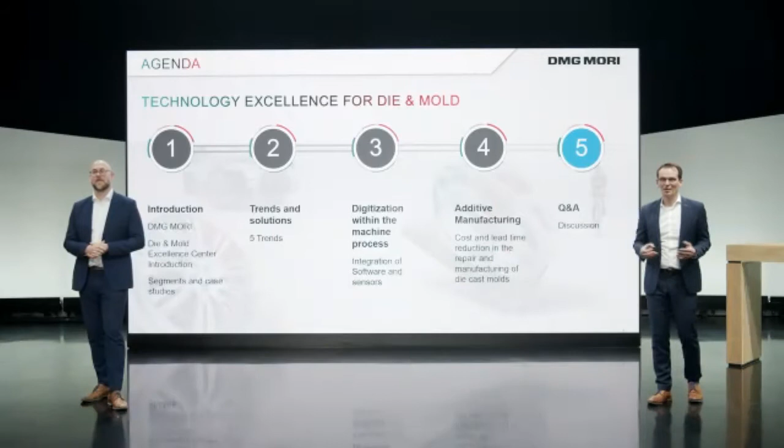So today we have collected our agenda where we give you some introduction about DMG MORI, who we are, what we are doing in the die and mold industry, which segments we are in, and we show some solutions. We then go to the trends available in this industry. We will go into digitalization, which is one of the five trends, and I'll show you something on the machine tool, how we use digitalization in the process. Then we go at the end to additive manufacturing, which will be presented by Marcus later. And then we have time for questions and answers and hopefully interesting discussions with all the participants.

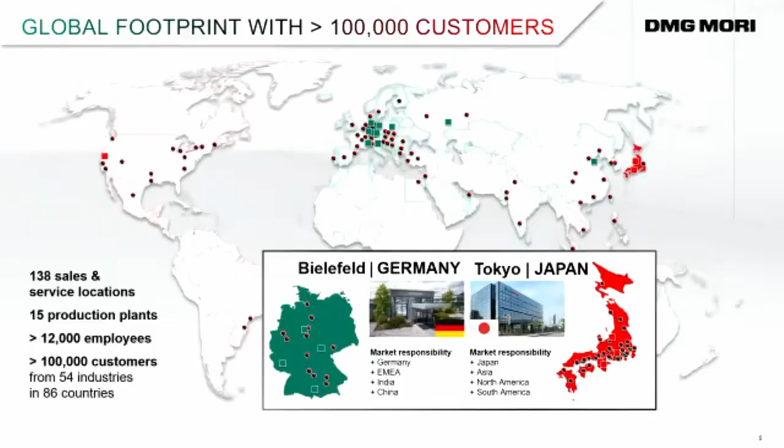We have many sales and service companies worldwide where we sell our machines and service them from. We currently have 15 production plants with more than 12,000 employees, 100,000 customers worldwide, across all the industries which need machining finally. From the factory point of view, that's 15 factories.

We have DMG MORI Aktiengesellschaft, which has its headquarter in Bielefeld in the north of Germany. We are here in the south, in Pfronten. We also have DMG MORI Company Limited, with headquarters in Tokyo, Japan, with factories in Japan, China, as well as in the United States, in California.

We have a wide range of machine tools. We don't talk about this in detail, just to give you an idea that we have many, many products in this business.

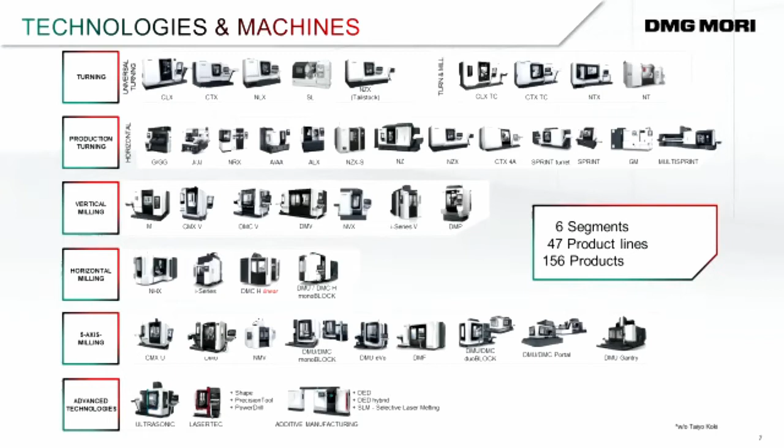To make it a little bit easier to give you an idea in which areas we are and which kind of technologies we have: turning technology, which are lathes, and milling technology, so milling machines and machine centers. But we also mix them. We have turning machines which can do milling and grinding, and milling machines which can do turning and grinding.

So we have technology integration depending on workpieces. We find here always the right solution for each application. We have advanced technologies like ultrasonic supported machining, and we are used to working with lasers since a long time. We have LASERTEC as one of our segments.

And in the die mold industry, you find this for shaping of molds, for example, to get your shape or your feature on the finished part later. We can combine a milling machine and put in a laser, and we can machine a mold, then use the laser to shape the surface.

Then we have additive manufacturing, a very growing segment here at DMG MORI. Markus will later talk about this. Automation is very important for us - we'll see this later in the trends. Automation becomes more and more important. In the past, it was mass production. Today, even for single piece production, automation makes sense in a certain way.

Digitalization is very important for DMG MORI. We have many solutions here. Today we'll talk a little bit about this.

Technology excellence means we have excellence centers for different industries like aerospace, die and mold, medical, semiconductor, and others, where we have specialists who take care of the specific needs of these industries. The machine tool is doing milling or turning, but it depends what you are machining, and we can make sure that our customers get the dedicated solutions for their industries, for their needs.

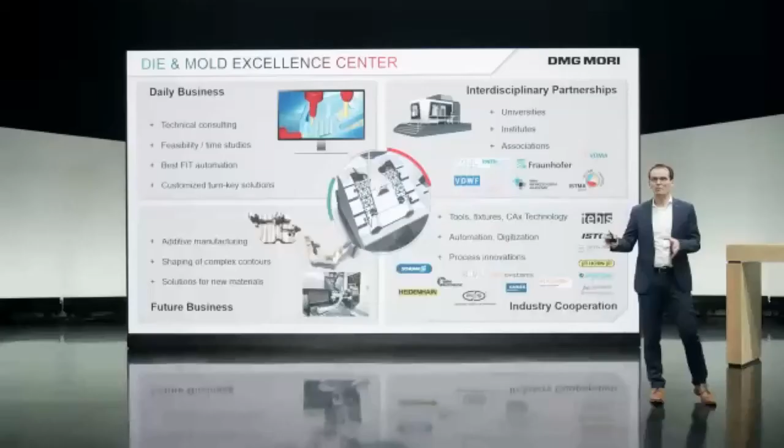And of course, all our work is also based on a big partnership with many industrial companies, where we have solutions along the whole process chain, from programming, CAD/CAM systems, to tools, clamping systems, and so on. So we are partnering here with many companies in this field to always be able to offer the best solution to our customers.

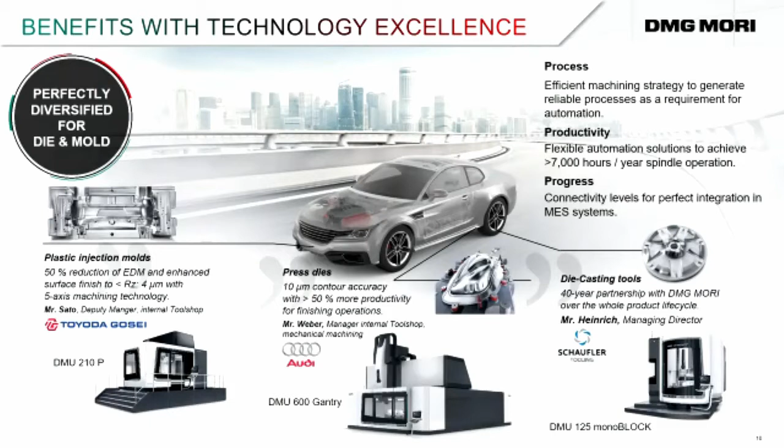The benefits, of course, for our customers is that they get a perfect solution finally, and we get also good feedback from this idea of technology excellence. Being specified on these industries pays back over time for us and makes us really happy that this works, and customers really give us good feedback here.

In which segments our machines can be used - of course we have a wide range of industries in this business. We have plastic injection molding, as you know. We have blow thermo molding. We have the metal world here with castings, with forming, hot forming.

I won't go through the details of which kind of solutions we have. When customers come to us, we look at the workpiece, the size, which accuracies are required, how the surfaces should be, what is the geometry, how complex the parts are, what is the budget of the customer, and then we make sure that we can offer the right solution for our customers.

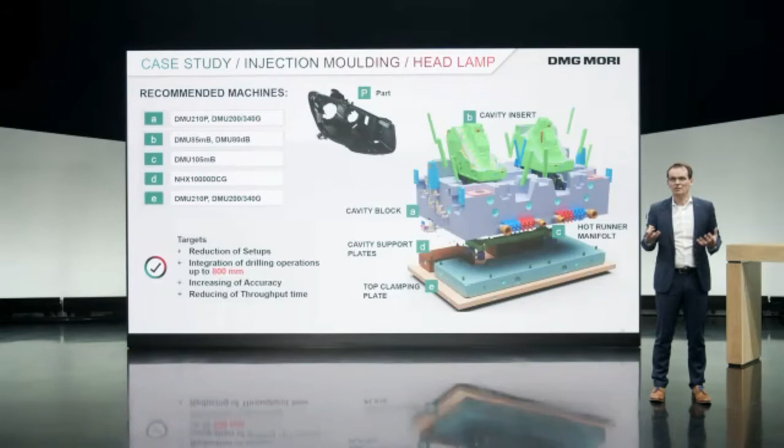When we go a little bit into the details of some case studies, how this can look like - and you are all experts from this industry - here in this example we see injection molding, mold assembly, and this is for a headlamp for the automotive industry. We understand that this is quite a complex tool assembly.

There are different types of mechanical parts which need to be machined, and as you have seen before with our portfolio, we can make sure that we find a proper solution for every kind of component here.

Of course, when we look at our technology, which we have specifically in this factory here, Deckel Maho, Pfronten, where we focus on 5-axis machining, we are interested in, for example, the cavity inserts. I brought a nice example here of the cavity insert of this headlamp mold, because we did a case study on this for us to learn and to show our customers how capable our machines are.

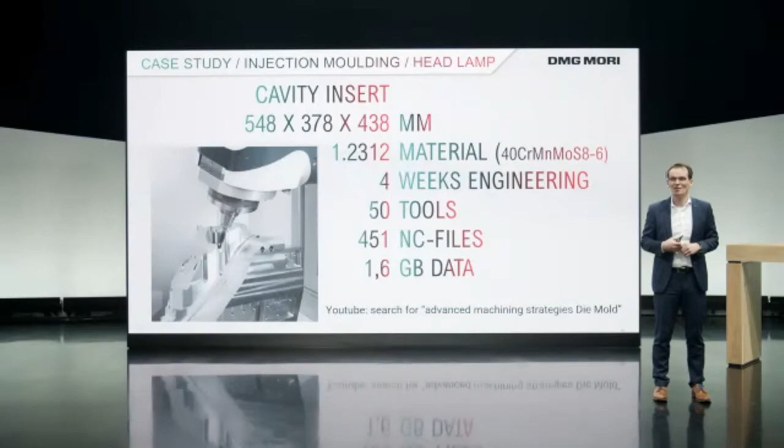You can imagine the size of this piece. We invested a lot of energy together with our partners, invested some engineering here. At the end, we produced more than 450 NC files and 1.6 gigabytes of data to make this 5-axis machining happen. You can find this movie on YouTube by just searching for advanced machining strategies and die and mold.

I show you the movie to bring some emotion into this, or I feel some emotion when I see this. So we can see now in this movie some cutting strategies which we put into this movie. Of course, this only shows some finished machining operations.

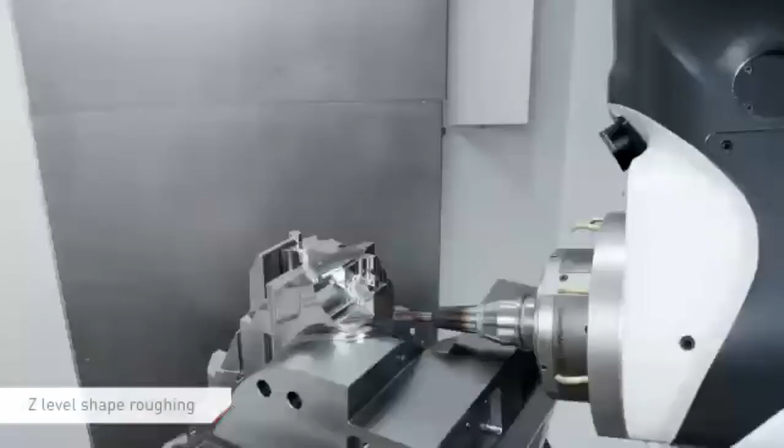You can imagine there's much more in this 1.6 gigabyte of NC data to make the part, but it shows how capable today's 5-axis machining is to make these kinds of parts in a very productive and efficient way.

Here in this example, we have worked together with Paul Horn for tools, for example. We have worked with hyperMILL for the programming, and only in a partnership can this happen. We cannot do this alone.

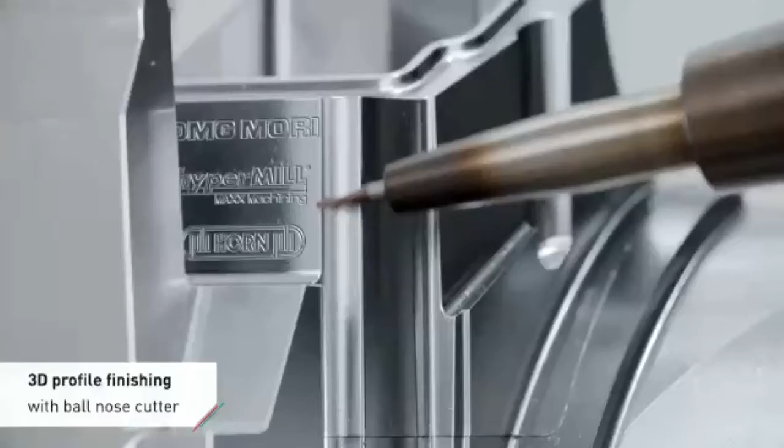We have the machine tool. We have, of course, people who can do this, but we need the experts also from the other companies who are involved in this. We need the other specialists to make something like this happen and to demonstrate this to our customers so that they can understand how efficient and how productive parts like this can be done.

So we can watch from outside forever to these movies. We really like them. This movie has been on YouTube for 1 week, and we have, I think, today 20,000 clicks and very nice comments on this.

You have seen on my title, I'm more coming from the aerospace industry. We have also parts like this in the aerospace industry, but also in this industry, long times of machining is sometimes very useful, very much used.

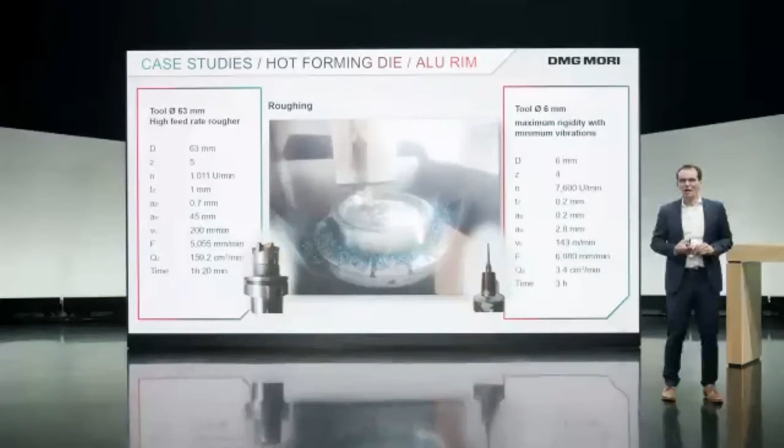We see here some examples for the processes. This is very detailed, of course. We show this to customers to make them confident that we understand how to make these parts. And of course, we know what is the requirement for the machine tool, that the machine tool is able to make such forms here, such molds.

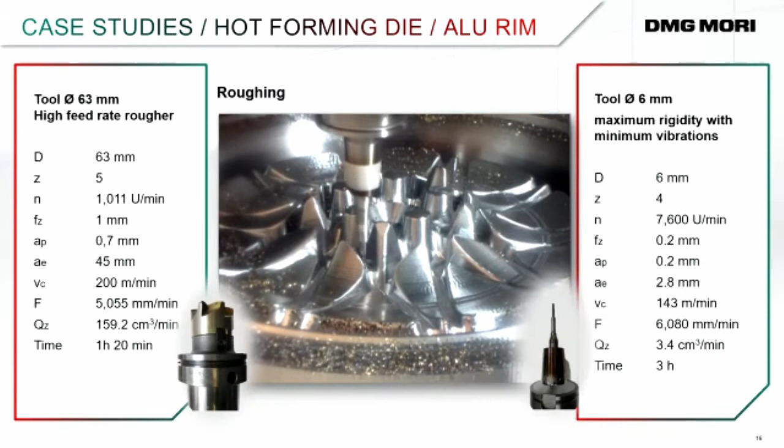Because here's at the moment the roughing process with 2 different tools. We have also here the finishing, and also the last tool here. You have to imagine this runs almost 70 hours on this rim mold to make shiny rims for our cars.

So die and mold meets us every day, also in private life, and we have to understand where these parts are coming from.

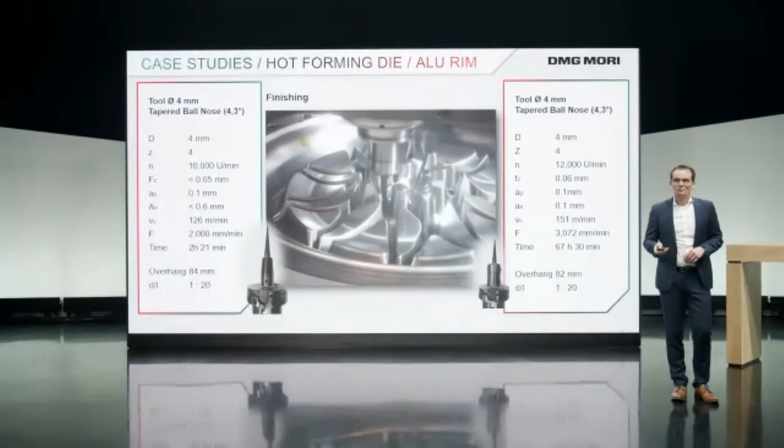There are many other examples. I don't want to show too much, but just want to give you an idea how complex these different parts are from different segments of this industry.

Here we have a die-cast mold core. It's a cover where we have machined the form on our machine, one of our machines.

Of course, when customers come to us, they always ask, can you do this on your machine? Can you support me to do this on this machine? And what is the cycle time? And can this machine make it faster?

Depending on technology, of course, for example, 5-axis machining is a big contribution to become faster on this, to become more industrialized, to be more productive.

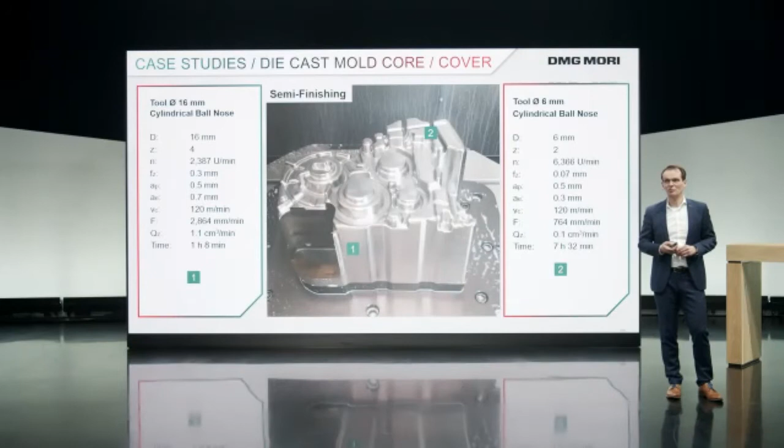We show this to the customer, that it's possible to make it faster, but at the end, the quality must be good, the part must be good. And this is in combination with the cost we have to achieve this.

Also here are some examples of the details, how this part is finished with which kind of tools.

So this gave you hopefully a little introduction to what DMG MORI is doing in the die and mold industry, how we are organized, who is DMG MORI, and what we are doing in the die and mold industry.

Now I want to come to another topic, talk about the trends and solutions. We have identified, also working together with institutes and universities, what is important in this industry today and what becomes important in the future.

When we look back to the last century, this manual die and mold industry was more the philosophy of this industry, everybody knows what I mean. We have now seen a trend that it's more industrialized today. So today we see a lot of industrialized tool rooms which use modern technology, modern CAD/CAM systems, modern machine tools, 5-axis machining, and so on.

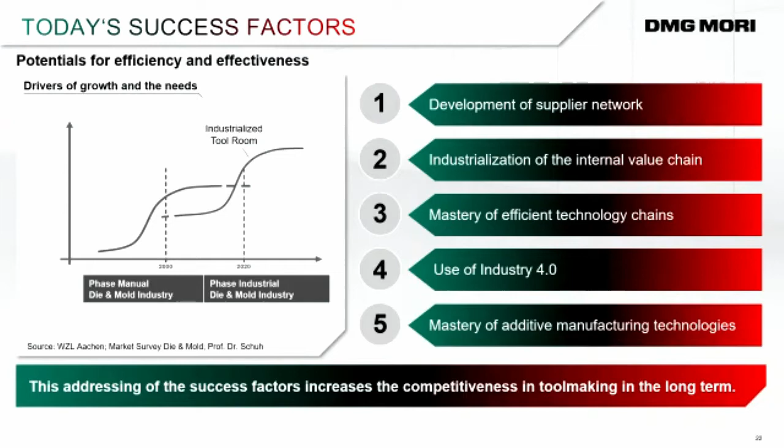And of course, when you look at the curve on the left-hand side, it's getting more flat now. This is the principle of this. When you have this change, you are in an area, or in a time, where you have to find a way how to differentiate.

And here we have identified, not just DMG MORI but in discussion with others, what are, for example, 5 success factors for the future. I've listed them here, and I will go into more detail during my talk, and we show examples.

We have development of supplier network. There's nothing to do with the machine tool, but we think it's very important that our customers are doing this.

Industrialization of the internal value chain. You will see what I mean when I come to this point.

Mastery of efficient technology chains. This goes very much in detail into the technology, where of course we have to look at what we have done in the past, and we have to look into the future how we want to do these things, and what opportunities we have in technology to become better, more productive, and more efficient.

Digitalization, a big buzzword in all industries. We come to this point. I will show a little bit more here how we do this on our machine tools.

And the 5th trend, mastery of additive manufacturing technologies. This will then be presented by my colleague Markus Bäumler.

Important is that when companies in this industry address these success factors, they increase, or can increase, the competitiveness of their business in the long term. This is, I think, maybe there are even some more factors, but for us, this was the 5 most important ones.

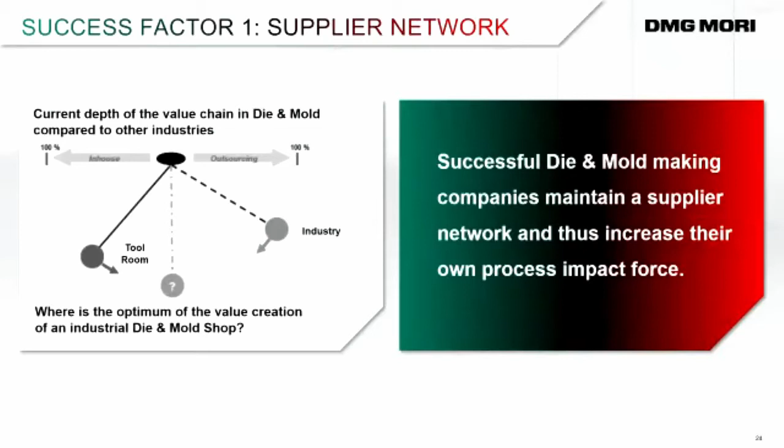This had advantages, but it also has disadvantages. We saw this during the pandemic, that this globalization, suppliers all over the world, is also a weakness. But I think a good middle way between both, a good compromise between make and buy, makes sense.

And also what we see here in this die and mold industry is that this should be considered in the future: you should concentrate on what you're really good at, and where you're not good at, where you're not competitive enough, but you need this, you should have a network of suppliers who can support you.

This can be, of course, for the work pieces itself, but it could also be along the process chain. And process chain means also from your planning to your engineering work, to the production, to the quality inspection, to your other jobs you have to do along this process chain. I think it's important to work together with the right partners, because together you get stronger.

On the second trend, industrialization of the internal value chain, we have to understand that when we look at the tools, the molds, around 35 to 45% of the cost of producing them comes from machining. So machining is a very important part of this industry.

And what we see today more and more is that our customers want to optimize. They want to work 24/7 in this industry.

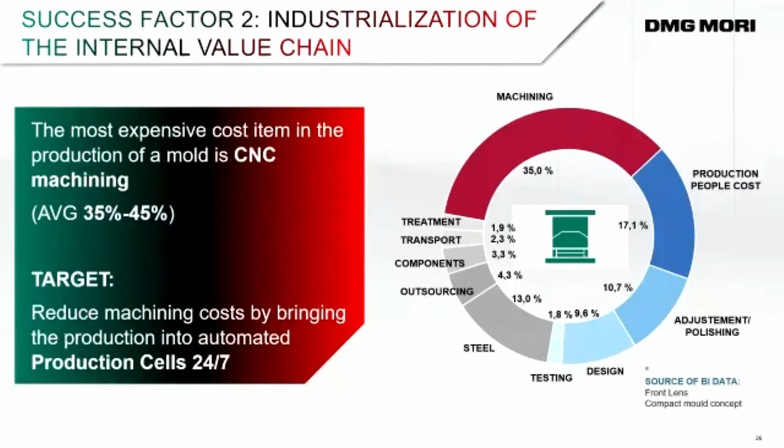They're still working on single piece production sometimes, or most likely on single piece production. But today's technology offers us the opportunity to work 24/7. It's not mass production, we understand this, but it's possible, and I think it's a big trend which should be followed in this industry more and more. What does it mean finally? Productivity is key. You have to utilize your machine as much as possible because this is an investment which costs some money, and you have to use the right technology.

I mentioned before 5-axis machining. The machines coming from this factory are all 5-axis. You don't need this for every component, every mold, every form, every tool. But when you have it, you have a lot of opportunities to remove some other work. You can remove some EDM, for example, when you go into cavities by using 5-axis.

With high-speed machines, with, for example, linear axis in the machine tool, you're becoming faster in the manufacturing, in the machining process, especially on the time when the spindle or the axes are moving without machining. You want to save the time. So productivity is key. The machine should be reliable and offer you a stable production process.

Automation and lean manufacturing, of course, helps you to connect the machines or to reduce the manual intervention during the processes, so you can increase your productivity even for one-piece flow. It depends what kind of tools you're using along the process chain to prepare this work for the one piece. But if you do this in the right way, you also can optimize in this industry and become very productive, and you increase your value when you're looking at the internal value chain.

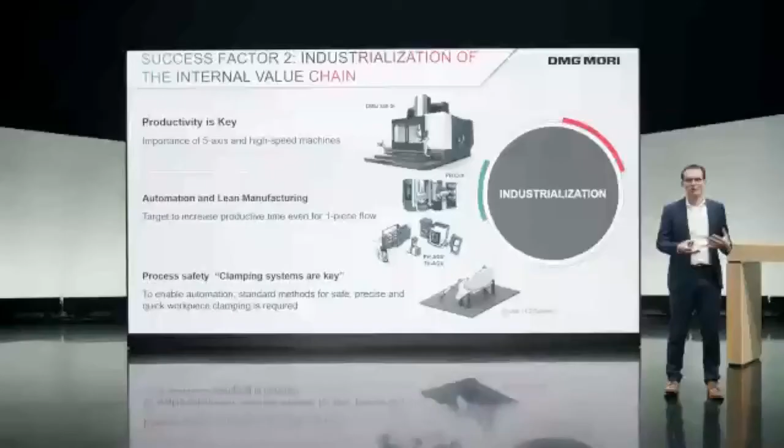Process safety is very important. In aerospace, we talk about green button processes, meaning you have a complete automated process. We keep the door of the machine closed as long as possible, or at best, keep it closed during the whole process. This is also possible, of course, in this industry.

Clamping, for example, is a very important point. It helps you to standardize your method of clamping when you do it in the right way. You have easy and fast setup situations where you can change the content of your pallet very fast, bring a new part on this to maximize utilization of your machine. And also with the right clamping, of course, you have a safer process with less quality problems and a better final workpiece result. So this topic, as an example, is important for this success factor 2, industrialization of the internal value chain.

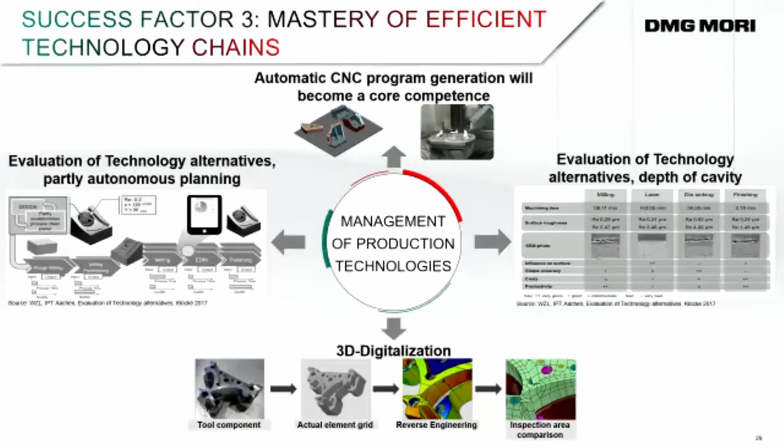The third one I mentioned before: mastery of efficient technology chains. What does this mean? At the end, technology drives the industry, drives the technology, drives finally our business success. And you have to look to this. You have to have people in your company who are looking for alternatives. Something you're doing since many years is probably good, but maybe there's something new. You should look at this and consider this.

Here are some examples when you look to the CAD/CAM systems. When you have single piece production, of course, every part needs a specific NC program, but the parts are similar. You can work with standardized strategies, standardized tool parameters, and you can start to generate your CNC programs more automatically. It's not something you do from today to tomorrow, but this is the trend where our customers are working on today.

When you look to your value chain, process chain, how you plan your parts, what kind of technologies you're using to achieve specific features on your part, look left and right. What is available today? What are the institutes and universities doing today? What are your suppliers, maybe on the machine tool, on your CAD/CAM system, on your tools, doing today? Bring them together, or also maybe join some events which we are organizing to see what is possible today.

There's also one example about digitalization. With 3D digitalization, when you have your part, you have a 3D model, of course you have your nominal model which comes from your CAD system, but if you then also have a model of your finished part, you can compare. You have much more information where you can learn and see how to improve your processes.

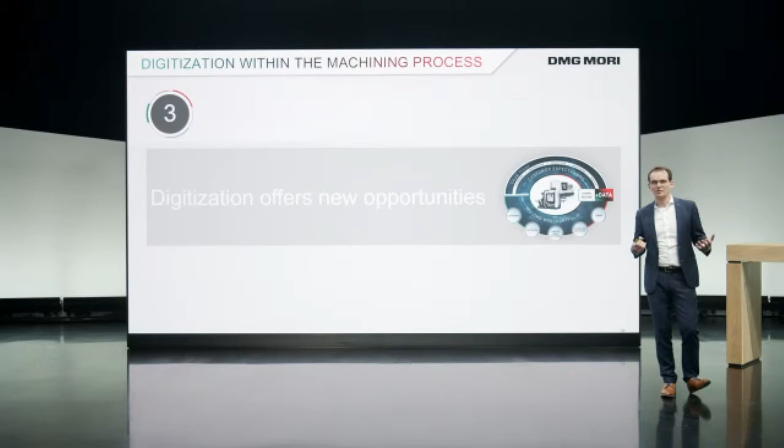And digitalization, of course, we have this. I started my career in the aerospace industry 30 years ago, and we did already digitalization with the tools we had at this time. Today, of course, the technology offers us a lot of opportunities. Everything is faster, we can work with more data, and it's really smart today. I'll show you a little bit how we do this.

DMG MORI itself, we have seen for many years now that this will become a big trend. So we offer solutions along the whole process chain, from planning solutions, preparation of your production, the production itself, monitoring, service. We have digital solutions everywhere, and it would take I think 2 days to present all the solutions in detail to you.

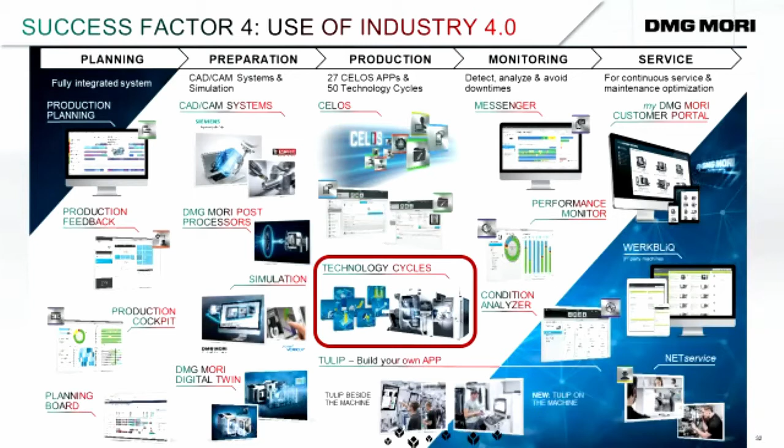I only want to go into one area, which is very production specific, very machine and process specific. These are so-called technology cycles, software which works on the machine tool to make the complexity of the machining process easier for you. You can easier handle the machine, easier program the machine, and easier understand the results of the process and output of the machine, and this is the topic I show now.

I'll go a step back, because I want to show you how this can be used to understand and monitor influences during the process, external influences on the process which affect your quality of machining, which affect the accuracy of the machine tool, of the result of what you want to do. That's why I go a step back.

However, we have some environmental influences. We're never in a perfect production hall. Maybe it's air conditioned, but sometimes we have some wind, cold wind, warm wind going through the factory. We have some windows where sunshine comes through and heats up the machine tool. We even have temperature changes in the factory, either morning or afternoon, or summer and winter. And we know from physics that steel, for example, will expand when it gets warmer. We have to find solutions for this.

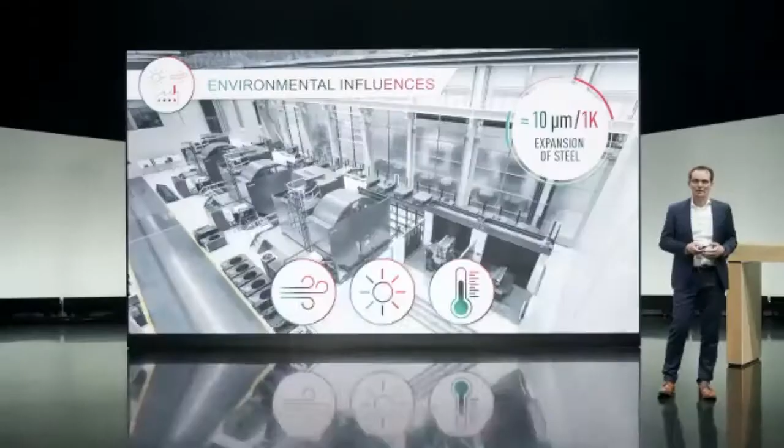We have the machining quality, which is important for us. But we have, of course, the machine tool, which has some influences or is affected by influences. We have these environmental influences, and we have the process itself, the machining, the cutting process. Altogether this makes the quality we need on our workpiece, on our mold, on our form, whatever we machine at this time. The cutting process is very dependent on the tool wear, because when we cut, the tool gets worn, and after some time we have to change it.

This is also dependent on the material we are cutting, on the cutting parameters, whether we do roughing or finishing, or whether we do good machining, or we have poor parameters - this has influence on the tool wear. Lubricant coolant is underestimated in many cases, but the quality of the coolant, the concentration and so on, they have a big impact on the cutting process and on the quality of the component finally, because it affects the tool wear. We have others, like clamping - when we have very poor clamping and we have vibrations during cutting, we see this on our workpiece later. So we have an influence on the tool wear again.

And I'll show you how we take care of this tool wear, how we can monitor this, and this is where we are today. But there's a lot in the future which we also expect to be developed, giving us more opportunities to react to these influences. We know it's coming, but we don't know when it's coming, or we don't know exactly when it's coming.

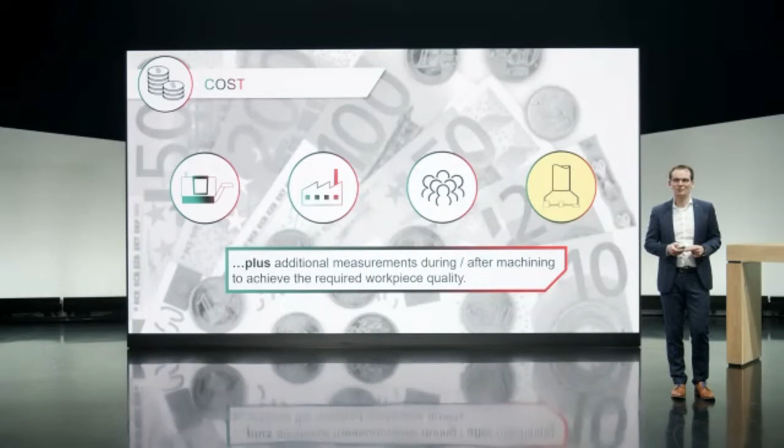So we're looking a little bit at this tool wear issue, because I think it's very important, and it's part of our investigations we are doing deeply at the moment with digitalization. For this, we have so-called sensor-based technology cycles. So what is this again? A technology cycle is a software, and sensor-based means there are specific sensors in the machine tool which can communicate with the software. They deliver information, and the software can decide: that's good information, I can continue, or it's not good information, I have to do something. This is what we call sensor-based technology cycles.

Sometimes I compare this with innovative assistance systems. Today we are used to this every day when we go to work in our car. We have lane assistance, we have braking assistance, we have a lot of assistance systems in our cars. They help us make driving easier and safer. This is what these systems are doing too. I will show you three of them, just for you to understand how important this is and how important it becomes for the future, and which opportunities we will get by using this kind of technology.

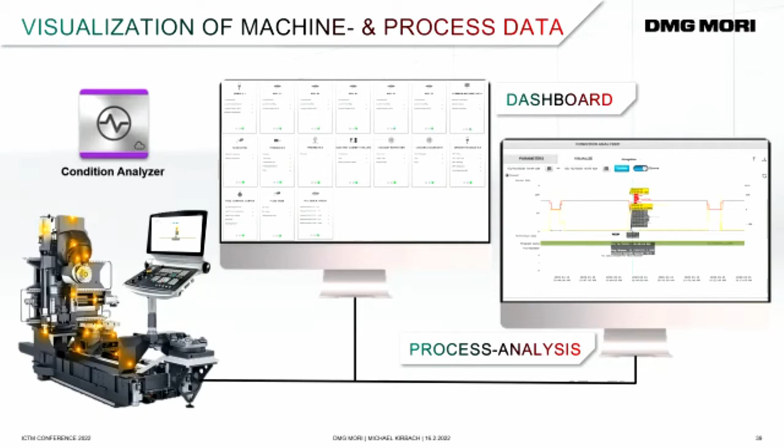First of all, when we have sensors, we produce data, and we want to see the data. As a human being, as an engineer, as an operator, we want to see what really happens in the machine. From experience, we know if there's a noise, if there's a vibration, there's maybe chatter on the workpiece. There's maybe a higher tool wear because of this noise. But when we have the data, we have something very neutral. It's not louder, not less loud. It's data, it's black and white for us, and that's why we try to visualize the data in a very easy way. It can be visualized on the machine tool, on the control screen, or in the office on a connected computer. You can see the data and learn from this. This is very important to start with digitalization in the process.

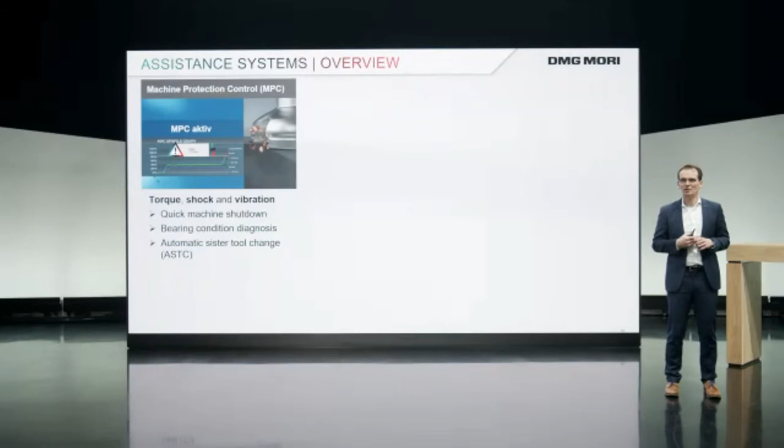So I'll show you a few practical examples of how this can work. Here we have a solution which we call MPC. There are sensors which measure the torque in the spindle. They measure the shock which hits the spindle, and they measure the vibration which can come from the tool, of course, if there's an unbalance for example. And there's a second one which is more sensitive.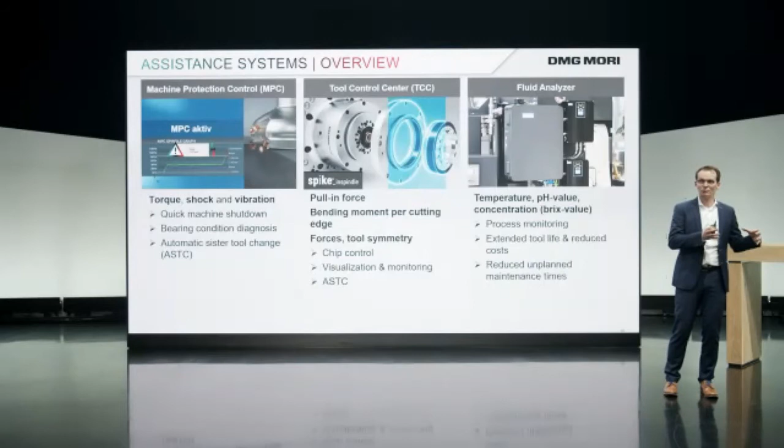And then last but not least, there's one we call the fluid analyzer. It measures constantly the temperature, the pH value, and the concentration of the cutting fluid, which I mentioned before. Concentration is important for the cutting process, for the tool wear. If we are out of a specific limit, we get bad quality, and we want to avoid this. We want to monitor this — we have to monitor this.

When we use this kind of tools, and these are just some examples, we can increase our quality, our performance, and our availability, which means in other words the OEE of the machine can be increased. Finally, we can make more money with cutting.

So I said I'd show you some practical examples. Here's an example where we clamp a part into a vise, and we do it wrongly. We have an overhang which should not be there, but this is a mistake which can happen in the workshop. And as the cutter approached the part, the sensor said stop, because the shock on the spindle was too high.

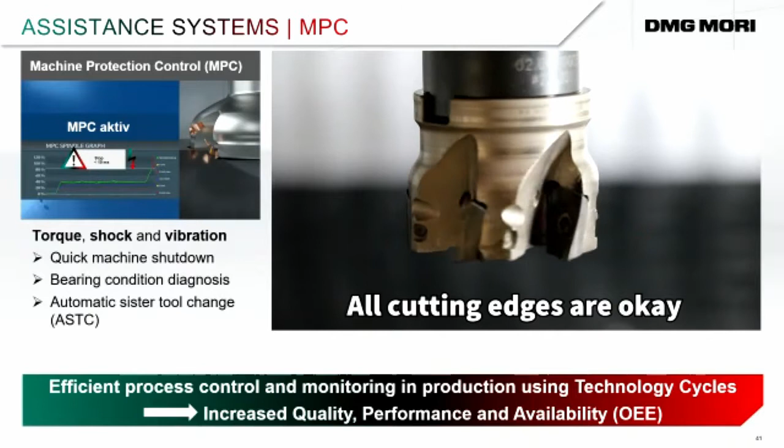It stops immediately, and we can see here on this little movie, the tool is still okay, because the sensor was able to react so fast that the tool is okay, the spindle is okay, the machine is okay. There's no repair required. It was a mistake, but there was no effect.

There was no problem. We can look to the data. We see, okay, there was a shock. We see the signal. We understand what is the root cause. We correct the clamping and start again.

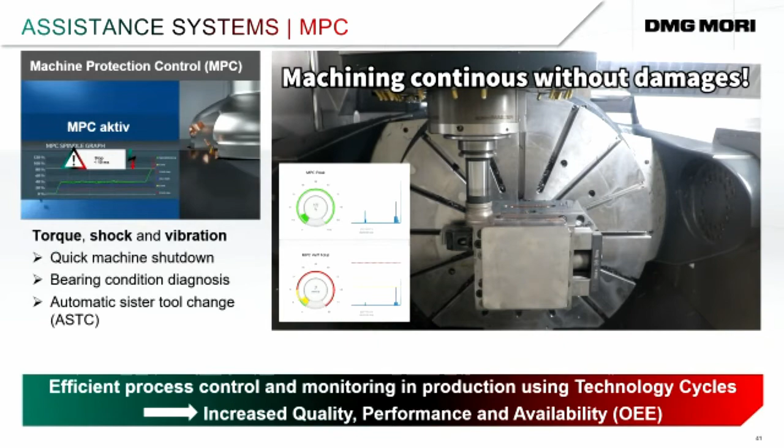And then we have now the right process, and we also can see it continues. The cutting continues without any damage to the machine tool, to the workpiece, to the tool. So sensors really are very helpful to avoid big problems when we do little mistakes sometimes.

There's another example which is coming from our own shop floor, where we make here a spindle casing from a casting. Also here a big tool. There's an unbalance, and the machine stops due to the unbalance in the tool.

We go to the analysis immediately on the machine to look to the data, learn what happened here. What was this noise? We understand the noise was a vibration. We look to the tool. There's a cutting edge broken. This is the root cause for the unbalance.

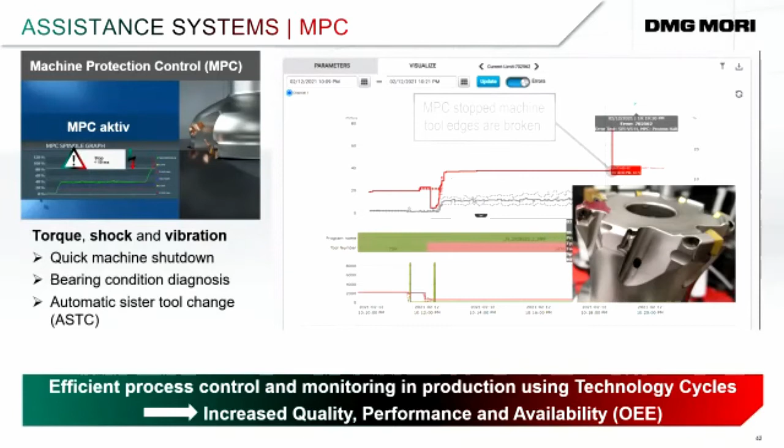We use this information. We reprogram, and then we make the next part. Same problem happens. The tool edge breaks. System can recognize it. Here we also automatically exchange to a sister tool, and we continue machining.

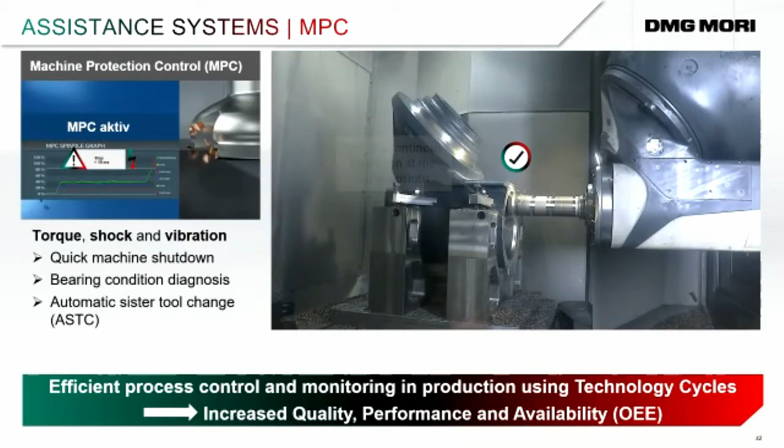And this is a video which was taken here in our own production, and we do this. We produce here 3 shifts in this shop, in this machine shop, and in the next morning they have good parts. They have no damaged parts. They have good parts, high quality, because the machine was able to react on these unplanned events automatically.

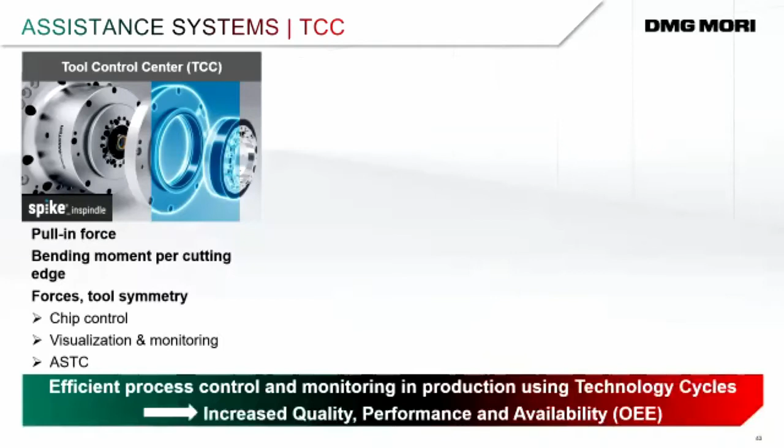Yeah, we have the other one which is more sensitive, where we measure. We have 20 sensors in the spindle, where we can measure very sensitive information, pull-in force, bending moment, forces in tool symmetry. For example, when you have your tool in the tool holder, and if there's a chip maybe between tool holder and the nose of the spindle, where both come together, you have a problem later, because your plane surface is not really plane.

You have a displacement of your tool, and depending on the length of your tool, you have a displacement of your cutter and of the tool center point, and then you have a mistake or you have a failure on your component. When you have no sensor, you will not see it. You will see it later when you have your part finished. You see there's a problem.

The sensor can detect this and can measure this and can say, no, I don't start. It will show you on the machine tool on the picture where the chip or the damage was detected. The operator can remove it, or you can do that automatically with a cone cleaning in the tool magazine.

You can do an iteration process. You can program this, and then you avoid the machine stop. You avoid this issue, this problem on your workpiece, by just using a simple sensor signal to detect this system.

And customers tell us they don't have this every day, but once a year you have this problem, and you can avoid scrap on your component or quality problem. These solutions are really useful for this.

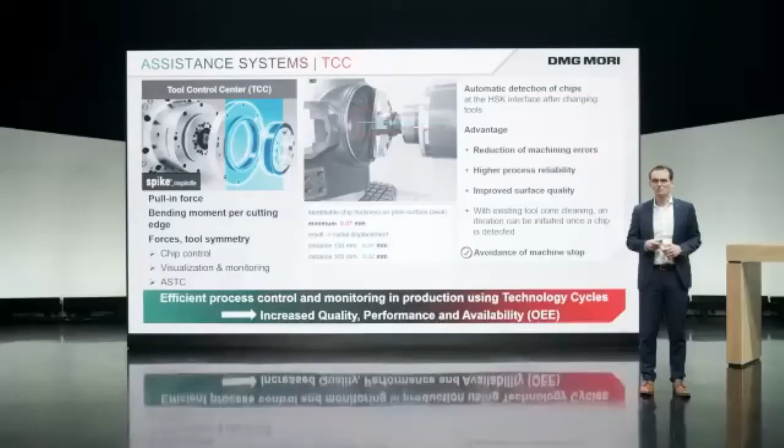You can measure also forces on the axis. You can measure the load of the spindle. But when you then look to the Z, which is the length of the tool, and you multiply the force and the Z, the length of the tool, you get the bending moment. And multiplying this, you all know from physics, this gives you a very high number.

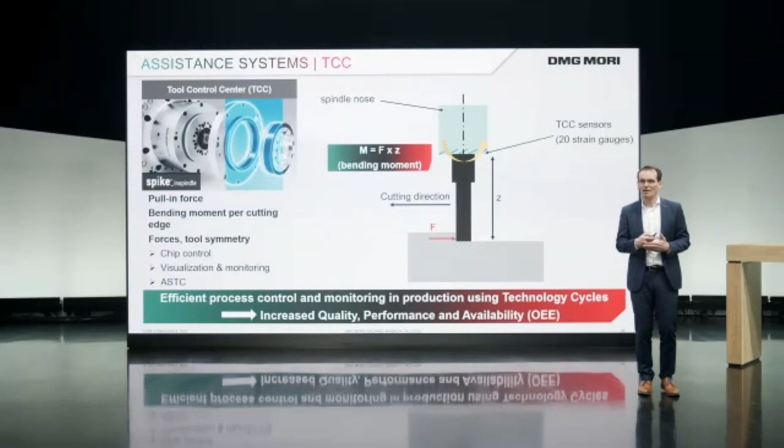And this means you get a very sensitive signal to see how much force the tool has to work against when it machines. And we have seen that when the tool gets more worn, the force is getting higher, because there's more force required to machine the part. And we use this. This example here in this movie shows how we machine a pocket with a tool, and the system recognizes the bending moment is too high.

It stops, changes the tool automatically, and then continues the cut with a new tool with a bending moment which is normal, because we know the normal bending moment, or the value which we see here represents a new tool, or a tool which is not worn to the limit we have defined before.

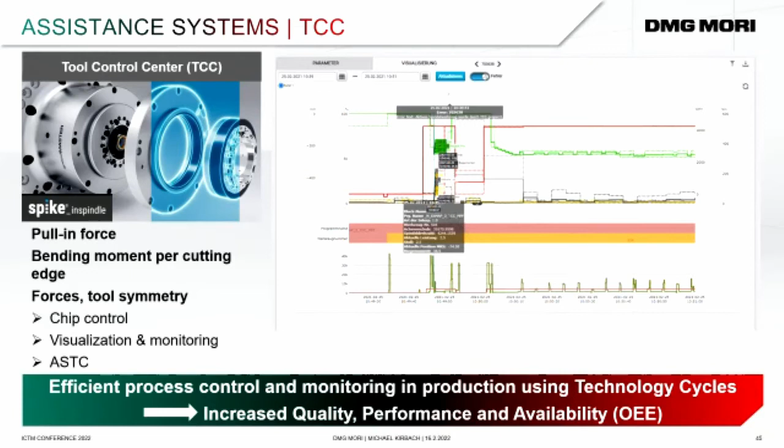Also here we look into the data, we understand the reality and compare this data. We make use of this. We also can look to other data, whether we find something which we think is maybe, we have to question ourselves again, what happens here in the process. But the data show us the reality, and we can take corrective actions in our process and make our processes more reliable, more safer, so we can have more autonomous machining and use the full range of automation to have 24/7 production.

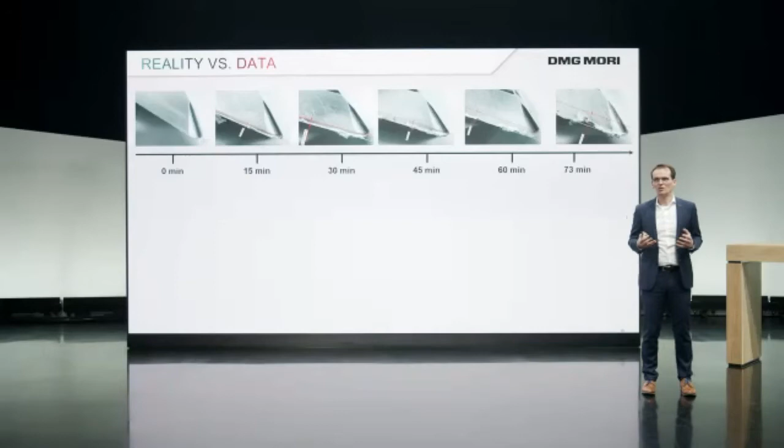Many customers are asking us, what is now the reality between the data? We don't understand this, and for this we did some tests here also. What you see here is one cutting edge of a 4-flute cutter. It's a solid carbide cutter, diameter 6 millimeter, which we use very often for machining.

And we see over the time, more than 70 minutes, that tool wear is going up step by step. We also measured this tool wear, we measured all the other cutting edges as well over this time, and we can see something we really expected before we did this test. The tool wear is increasing at the beginning linear, and later it increases exponential, which is a typical sign that now the tool is going to its end.

So the tool wear is starting to really bring in some big damages in the tool, and then there should be a very good time to stop now and use a new tool, because it's not very likely that we still get good quality with this tool anymore.

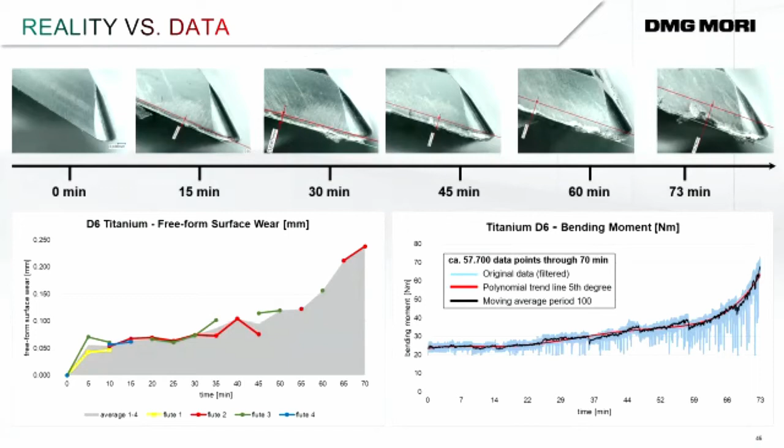Then we look to the bending moment, and we can see the same profile of the data as well. So the left-hand side, real tool wear, right-hand side, the signal. And we see the same profile, at the beginning linear, and later it goes up exponential. This gives us a lot of confidence that working with data, with sensor data, and when we understand the reality and the data, and we can combine this, we can use digitalization really well to make sure we can better understand the processes, we can optimize the processes based on the data, of course mixed with our experiences, but we have in addition the data, and then we can secure the processes.

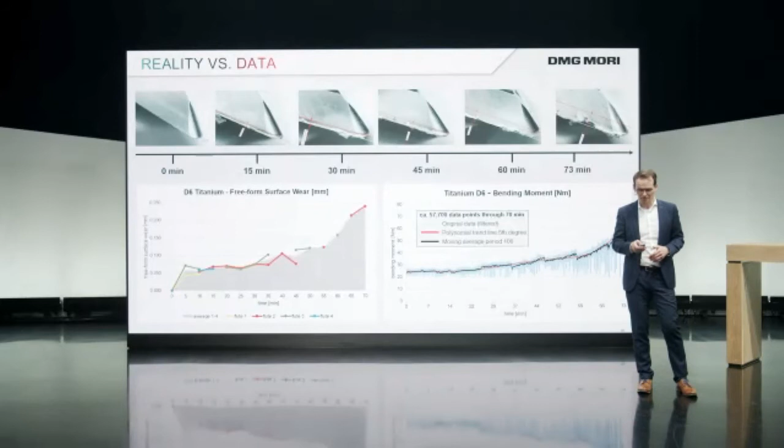We want to have autonomous machining. We don't want to stop the machine all the time. We don't want to have manual intervention. Maybe we have to have some adaptations during the process automatically. Maybe we even don't want to inspect the part anymore because we rely on the data. We have maybe digital workpieces, digital twins in the future, which really represent the real part, and from the data we can read how good the part is.

In the future, of course, there will be advanced analytics to understand the correlation between the processes which are in the process chain. We will see self-learning artificial intelligence, which we need to make better predictions based on the data. This is really, when we think about Industry 4.0, how to use this in machining processes, a nice thing where we definitely will develop more in this area to give our customers a possibility to follow this vision in the future, to come to more autonomous machining in all industries, not just mass production, also single piece flow, specifically in the die mold industry.

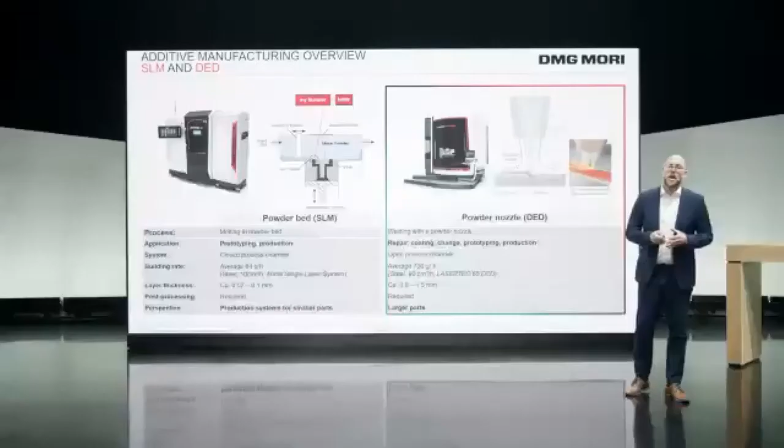Before I take a deep dive, I would like to show you what kind of technologies we can offer. On the left-hand side you see the powder bed system, which is probably more known to the industry. On the right-hand side you can see the powder nozzle principle, the so-called DED, directed energy deposition.

If we compare these two processes: on the left-hand side you have a machine bed filled up with powder. In our portfolio we can offer a space of 300 by 300 by 300 millimeters. That machine bed is filled with metal powder, and the machine is able to print very detailed cavities, very detailed parts, and thin wall structures in different materials, also titanium and aluminum, besides the tool steel.

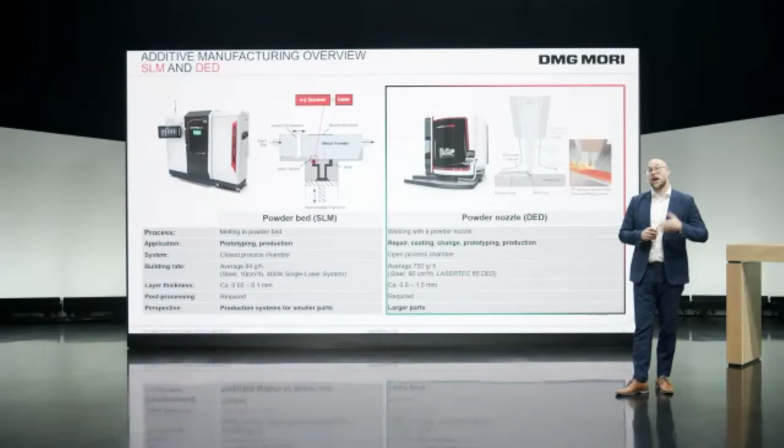The technology I would like to highlight today is on the right-hand side, the powder nozzle principle, directed energy deposition. Here we are spraying powder through a nozzle. On the picture you can see a cross section through that nozzle. The metal material is transported by argon as a transport gas. We spray that powder through a nozzle, hit it with a laser beam, and melt it up layer per layer. With this technology we can achieve really nice things for the die and mold industry.

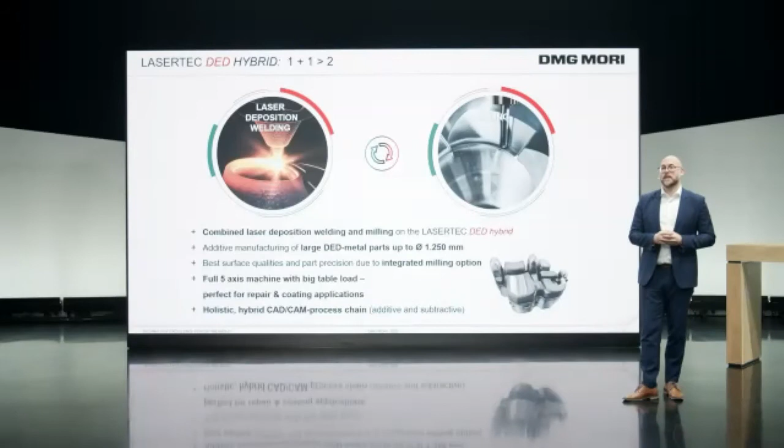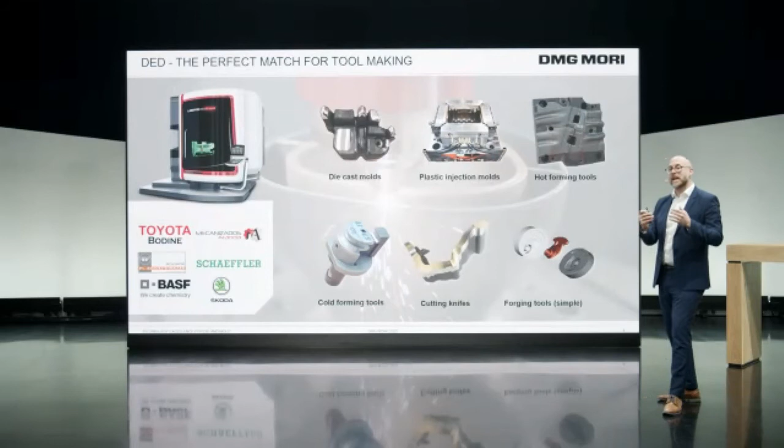For die cast molds, the best example is, as we just heard from Michael's presentation, 35% of the total cost for the die and mold industry comes through machining. So you would like to give that mold a second life, and this is what we can offer the industry using this kind of solution: we can repair existing tools.

The next example is for plastic injection molds—you can see that copper alloy on the mold. The benefit here is that we can use multi-material; we are not limited to tool steel. We can also use different materials which could optimize the process, for example to pull out heat.

The next example is for hot forming tools, also a very nice case. Hot forming tools face a highly abrasive process, and so far repairs are either done manually or with old-fashioned manual welding methods.

That system can do it all in one combined setup by adding a highly wear-resistant material with a very high hardness and a very high wear resistance.

For cold forming tools, I brought an example here. The beauty here is that we can homogenize the tools. Imagine you have tools in use and need a big stock of different tools. The beauty of the system is that you use one common base and print on demand whatever version of that tool you need. So you can reduce your stocks and also reduce lead time, since you're always able to deliver. And lead time is critical—we're facing issues at the moment through the whole industry.

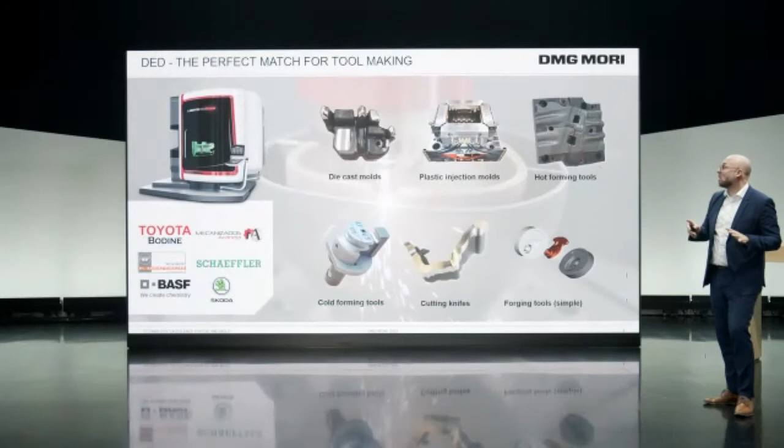Forging tools, simple, is something we would like to have a closer look at in future. At the moment we are developing the process for that. For all these applications relating to the die and mold industry, we already have industrial users, so please contact us if you need more information.

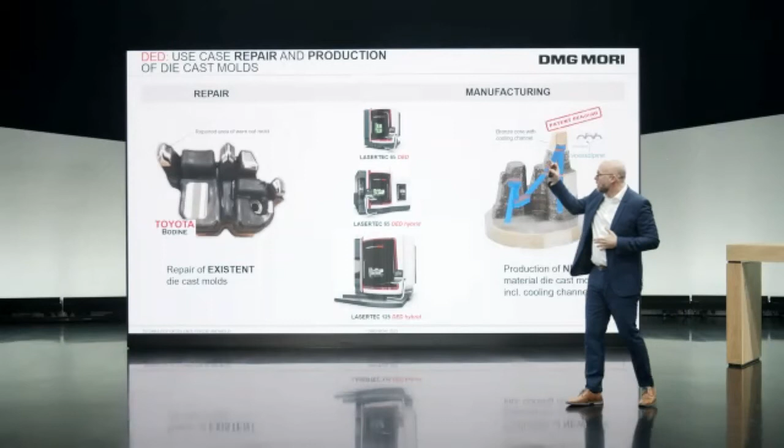I would like to highlight today the capability of two processes. One, as we see on the left-hand side, is repair. We've just heard that repairing very expensive die-cast molds is important due to the high cost of producing these tools, so you'd like to give them a second life—this is what we can do here. On the right-hand side, you can see the benefits of additive manufacturing: printing a mold in multi-material and adding a cooling channel to the inside.

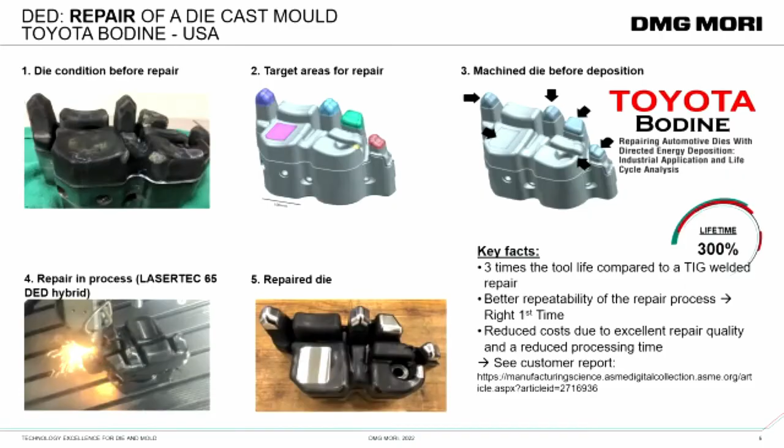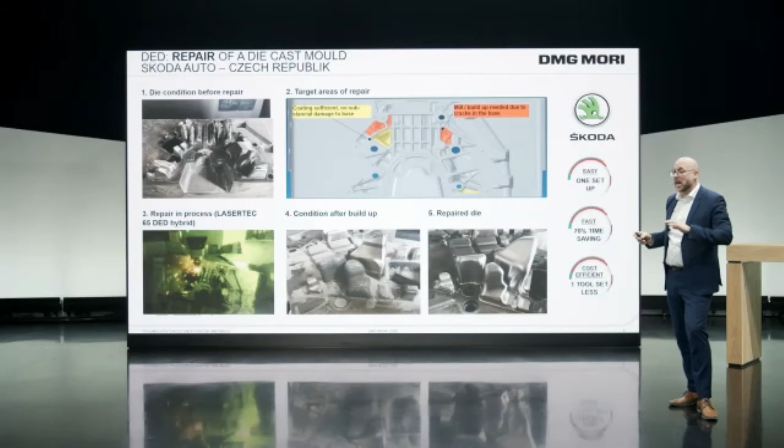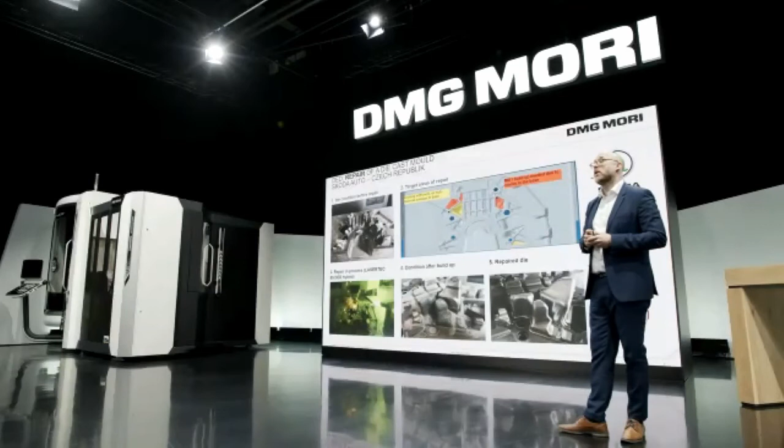What we do is design or decide in the NC programming path which way to go. If coating is enough, we just add a little material. Or you decide to completely take out the orange marked sections and build them from scratch on the existing tool, which is what we did on the orange marked area. Compared to the existing process, the cost saving or saving in production throughput time was approximately 70%—a very convincing factor to move forward with this technology.

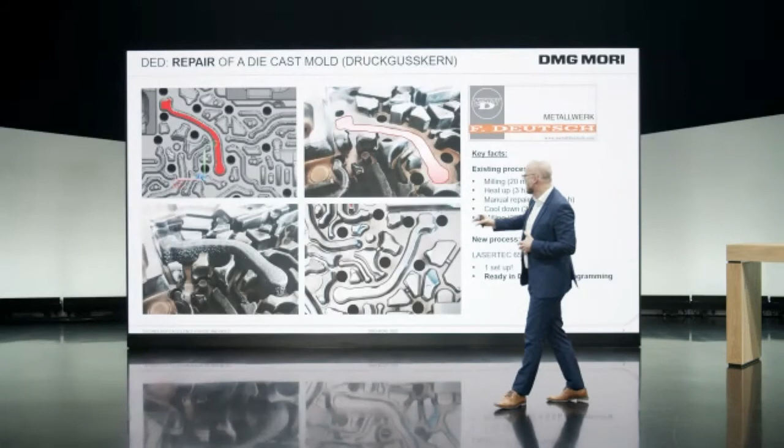Another beautiful example of repair, from the company Friedrich Deutsch: the red marked rib is damaged and requires repair. We decided to mill it out and build it completely from scratch—shown here bottom left—then mill it down to net shape, bottom right.

Compared to the existing process, we have a significant reduction in throughput time, which brings the customer a big effect in terms of how many tool sets he requires. Usually our customers use 2, sometimes even 3 sets of tools. Here, because the repair doesn't take very long, the customer has the opportunity to reduce by one set of tools.

This was what we can do, what we can offer for repair. This is what additive manufacturing in general can do for repair.

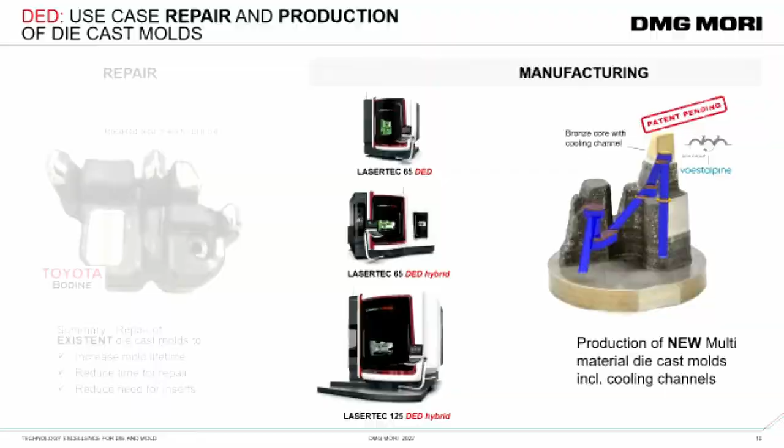Now let's have a look at what is possible if you drift away from existing tool designs to a new approach, new opportunities the industry is offering for die and mold parts. This is what we call the new multi-material die cast molds with cooling channels. Of course this presentation is related to die cast molds, but please also find the analogy for your process if you're in a different industry for die and mold parts, for example plastic injection molding and so on.

Here our customer had a big problem. The problem was that this engine bracket, which got produced from the die cast tool set our customer has, had a significant problem in quality, and the scrap rate the customer produced was too high to be cost efficient.

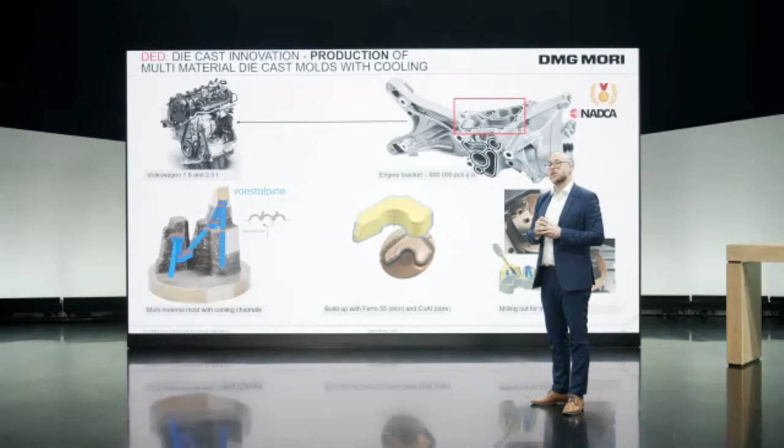By designing, in combination with voestalpine and the DGH group, a new kind of die cast mold, we achieved a significant reduction in production cost and a significant reduction of the scrap rate. All in all, 600,000 engine brackets, which are in use for the Volkswagen engine, got produced with a significant reduction of scrap rate. How the mold looks like, you can see here, top left and top right, you can see how it looks from the inside, and this is the benefit the DED technology can bring to the industry.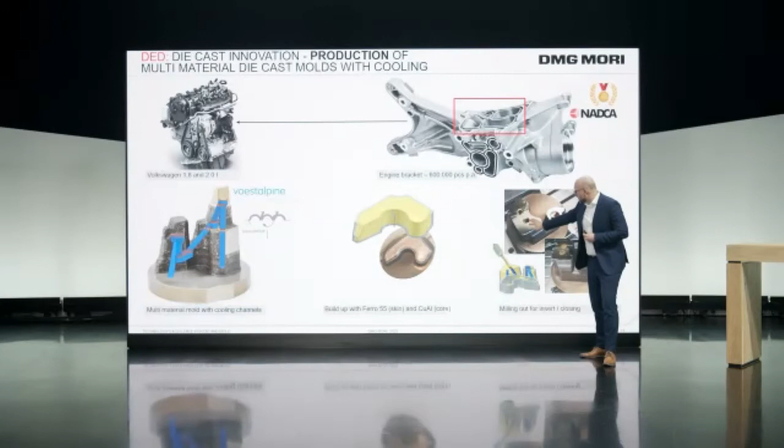So here we see the nice intersection between the copper alloy core and the outer skin, which was made from tool steel, in combination with the internal cooling supply.

Looking at the key facts of what has been achieved, please check out what we can offer, what the technology can offer. The scrap rate doesn't sound like much, reduced by 3.4%, but 3.4% scrap rate reduction at a production volume of 600,000 parts is a total saving for just one component per year of 180,000 euro.

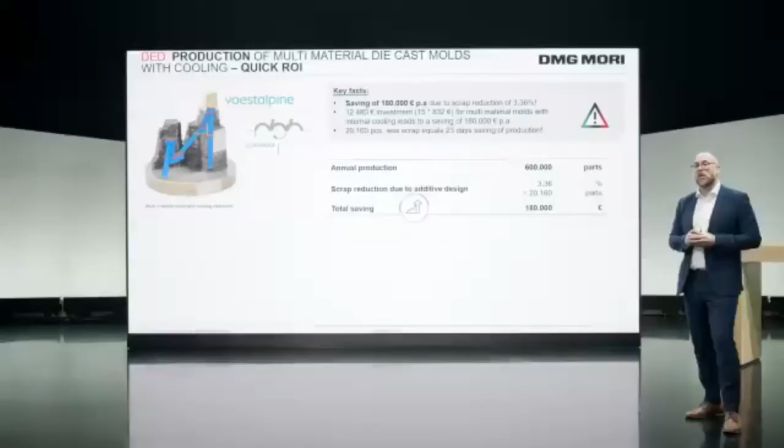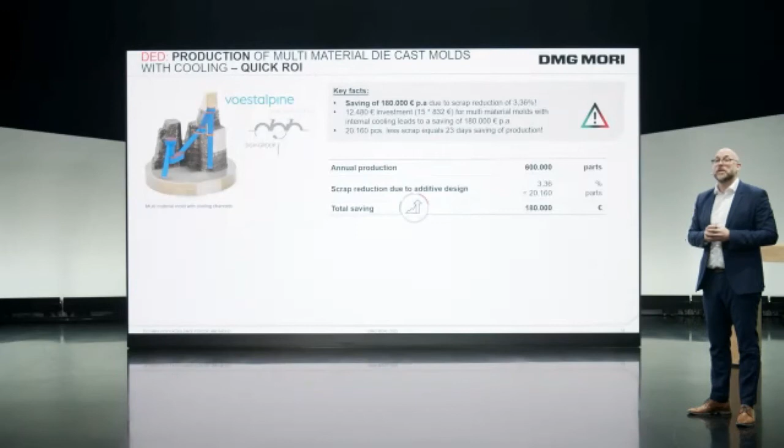Of course additive manufacturing is a quite cost-intense production method, but by using this kind of technology, the benefits overcompensate the higher cost for the mold. The higher cost of the mold is 832 euro per mold. But the total investment, due to the fact that 15 molds were in use to produce 600,000 finished parts, total investment only was 12,480 euro. And the saving was 180,000 euro. So there is a very quick ROI that technology can bring to the industry.

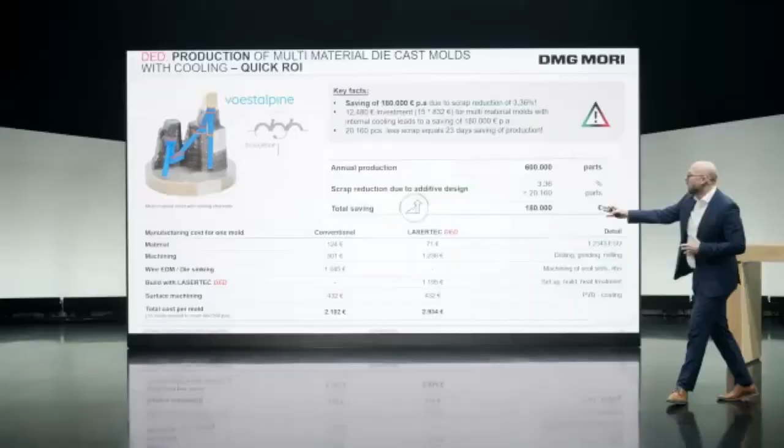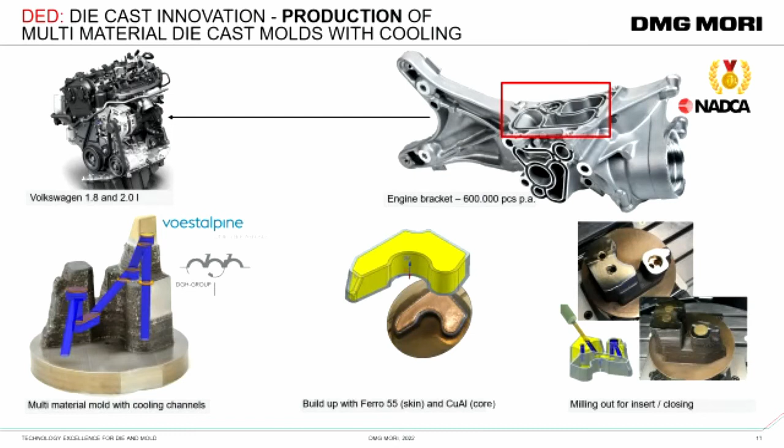Here we have a comparison of what the cost is for a conventional mold and what the costs are for the DED built mold. So this is where this 832 euro is coming from, to give you some background information. Additive manufacturing is always more expensive for that one single part, but additive manufacturing is solving quality issues - in this case, to make that part, you can see here, die-castable. Before it wasn't, now it is.

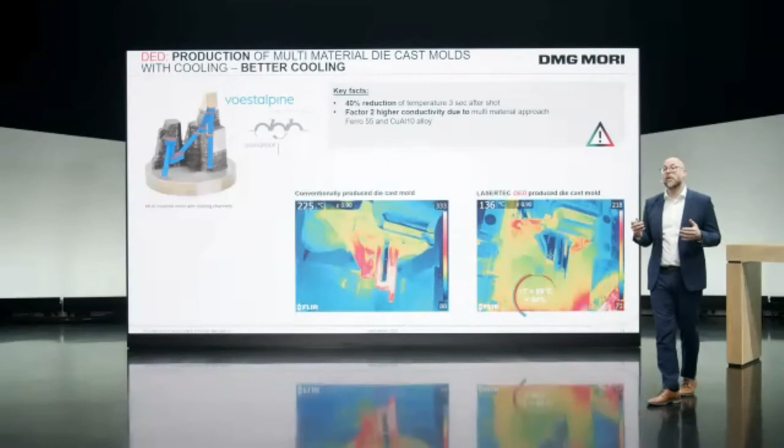So by putting this multi-material approach, by putting these internal cooling channels, the heat got reduced in the die-cast process significantly. In this example, approximately 40% less heat - 3 seconds after the shot, exactly here, the heat, this is the mold. At that point, the heat got reduced by 90 degrees, which is 40%.

By reducing the heat, you have optimized the quality because during the solidification of the aluminum, you are generating fewer pores or moving the pores to areas of no concern. Also, due to the fact that the thermoconductivity of the mold is higher, you are also able to increase the output.

So please remember and make use of this kind of information. Multi-material in line with internal cooling supply is a big, big opportunity.

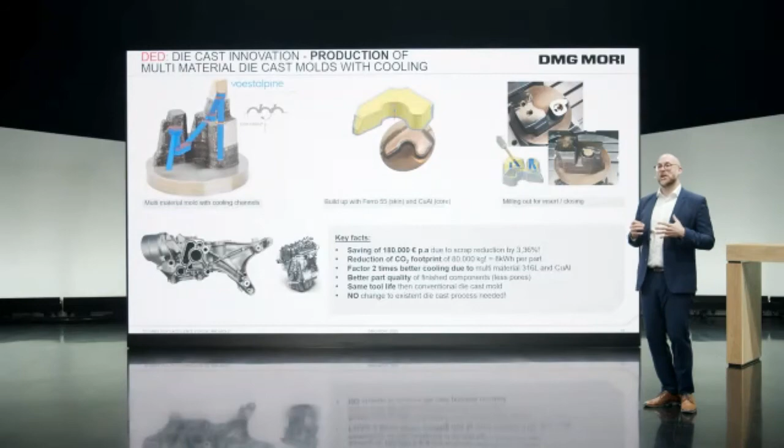Additive manufacturing - sometimes people are a little bit shocked: oh, this is a new technology, I don't see any approach for my company, I don't see any opportunity for my company. Maybe at the moment not yet for manufacturing of new parts, but I'm sure it offers the right solution for repairing. So please still keep in mind, repair on one side of existing tools, and on the other generating new, highly complex parts to optimize a not yet existent manufacturing problem.

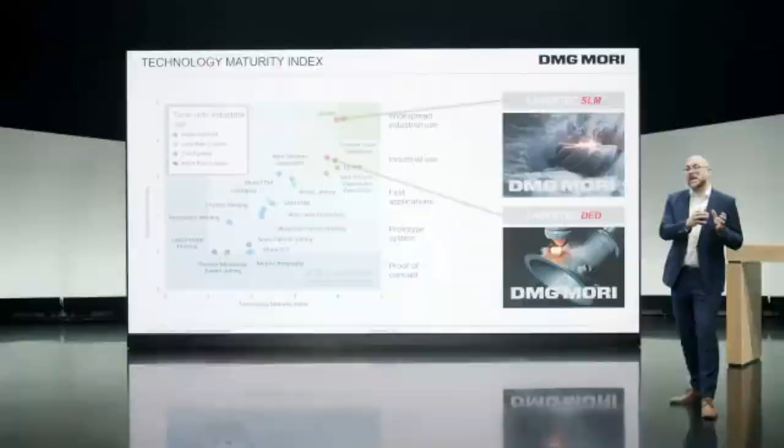Additive manufacturing, as mentioned, we from DMG MORI offer selective laser melting, called LASERTEC SLM, and on the other side, LASERTEC DED, which are both widely used in the industry.

This matrix we show here is quite easy to read. On the x-axis, you can see the technology maturity index, how mature and technically available that kind of technology is. On the y-axis, you see the industrialization, so how many systems are already in use.

For both technologies DMG MORI offers, we can say these technologies are highly mature and of course also available on the market. I admit the SLM technology, in our example the LASERTEC 30 SLM, has much more installations due to the fact that it already exists for approximately 3 decades.

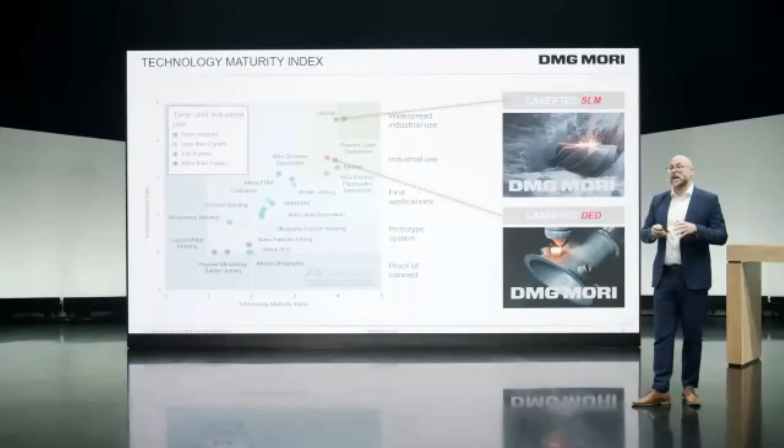The DED technology we offer is highly mature as well. The number of installations so far is not yet as high, but it is in the industry and available, and we have impressive references. Our unique setup is a combination between an existing milling machine and an additive manufacturing solution.

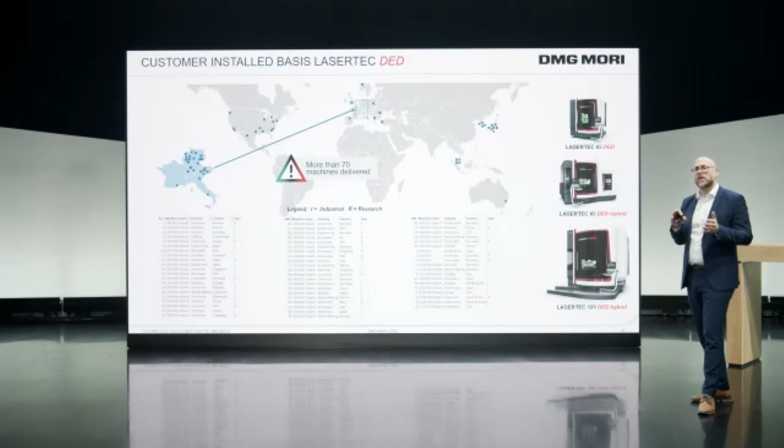All in all, there are nevertheless more than 70 installations of the DED technology. Looking at those installations, approximately 40 to 50% are in die and mold. If this should be of interest to you, please contact us at any time. And I think now there's time to answer some questions for you.

Thank you, Markus, for this deep insight into additive manufacturing. We hope that this agenda, these topics, are very interesting for you and added some value to your thinking about technology and about what is next, what will come in the future, what becomes important for yourself and for your companies. We really wanted to give you some background information on how we at DMG MORI think about this industry and what we think is important for the future. We're happy to have discussions on this, and looking forward to your questions.

Okay, so we already have a few questions from our audience. I'll start with Kamal Jain regarding the film you showed during your presentation, Michael. The question is about the very fine machining of molds - is this hardened steel that is being machined in your movie?

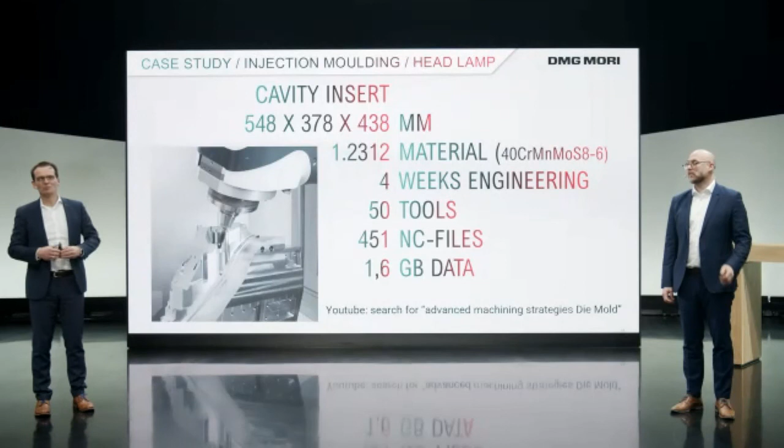Another question: is the application in die and mold different compared to the application in areas or products like aerospace in the case of additive manufacturing? I mean, there are many differences, but also many things which are very similar. Materials are different, the geometry of parts is different, sometimes the value is different depending on the material, of course.

But what I see, which is very common between both industries, is the need for industrialization, the need for these automatic processes, where we have to make the process as reliable as possible. Whether it's an aerospace part or a die form or whatever we machine for many hours, we have to enable the process or the machine to run very autonomously for a long time. That's why we need measurement throughout the process - we may need more of these sensors in the future to monitor and control it.

This is something common across all industries, a trend where in the past companies, independent of industry, machined something, opened the door of the machine tool, made corrective actions, measured something, made corrections on the control - and this is gone in the future. The machine door should be closed for all the time. It's a CNC controlled machine which can run autonomously for many hours, but we have to keep the process under control. This is common in all industries today, and here we have appropriate CAD/CAM systems which support us in building up the process, and the machine tools today are very capable of supporting this trend.